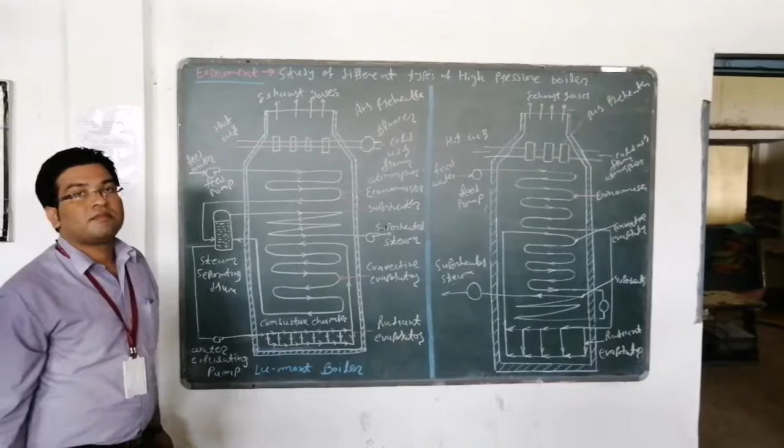Okay. Hello, today I am going to discuss the study of different types of high pressure boiler. Right? High pressure boiler. Boiler means what? With the help of the boiler, we can generate high pressurized steam. Right? We are talking about the conventional boiler, which consists of the Lancashire boiler, Babcock and Wilcox boiler, and Cochran boiler. These are the conventional boilers.

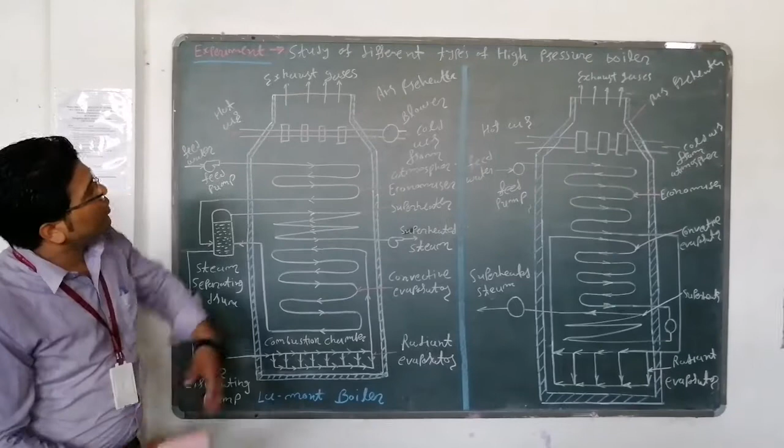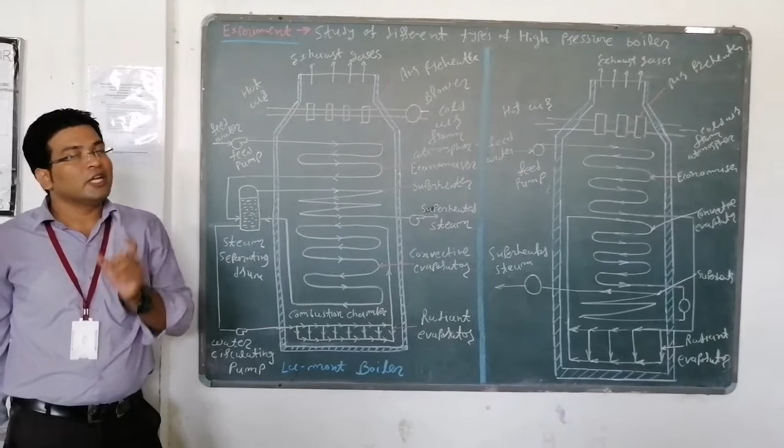Okay. Right now, over here we can study the different types of high pressure boiler. So you must know about the range of the high pressure boiler. That's why you must know about the IBR. What is the full form of IBR? Indian Boiler Regulation. IBR recommended a range of 42 bar and up. High pressure boiler range is 42 bar and up, that is called the high pressure boiler.

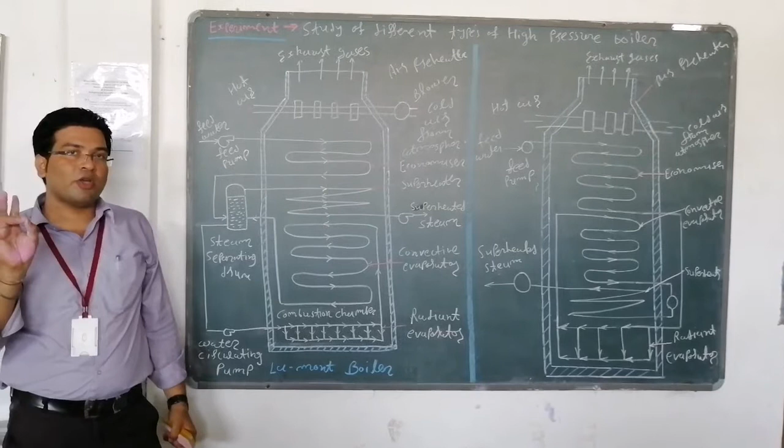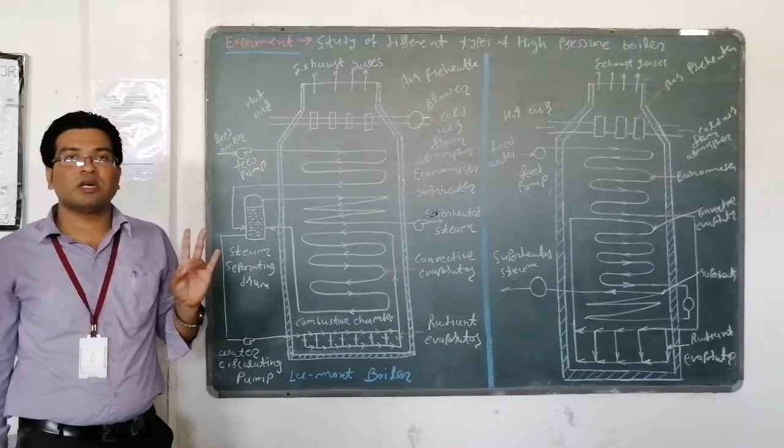So we can say the classification of the boiler is low pressure boiler, medium pressure boiler and high pressure boiler. Low pressure boiler range is around 3.5 to 10 bar, medium pressure boiler 10 to 25 bar, and above 25 bar, or we can say 42 bar, that is the high pressure boiler. High pressure boilers consist of a number of boilers: Lamont boiler, Loeffler boiler, Benson boiler, supercritical boiler, supercharged boiler. These are high pressure boilers, meaning the pressure range is around 42 bar and up.

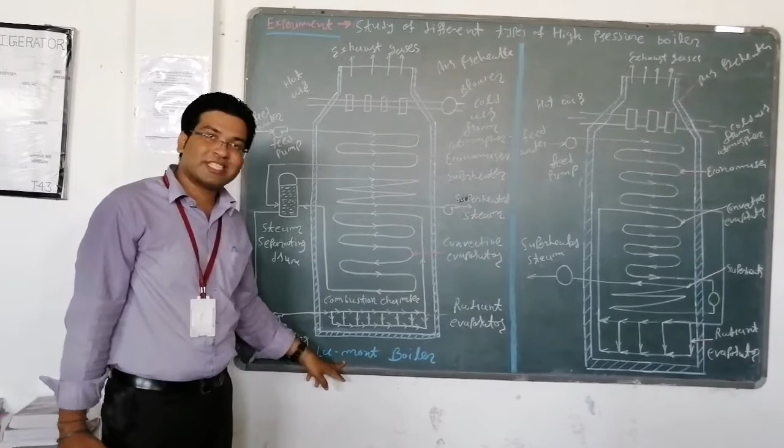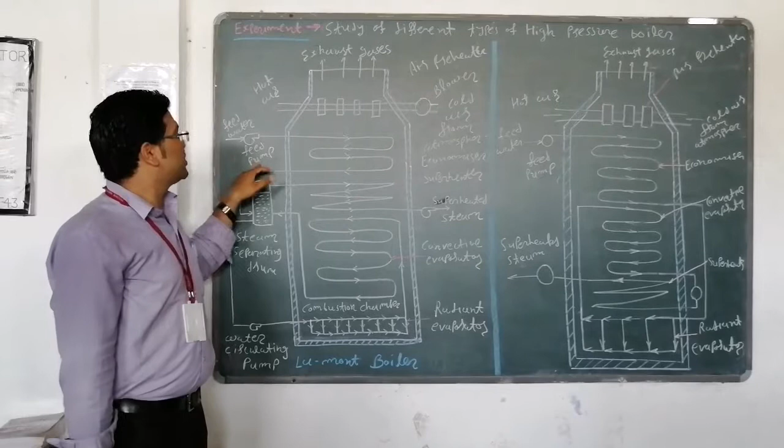So over here you can see this is the Lamont boiler, which is the first forced circulation boiler, founded by Lamont in 1925. Over here you can see the figure. This is the Lamont boiler. Forced circulation and natural circulation. Forced circulation means with the help of a feed pump; a little bit of pump is required for increasing the pressure. That's why it is called a forced circulation boiler.

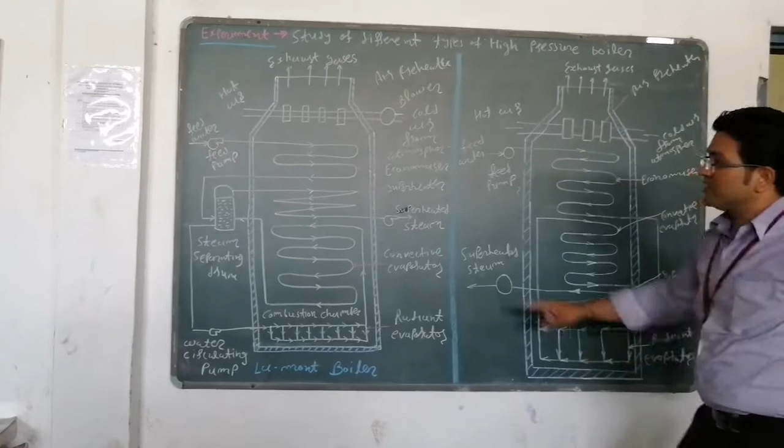Natural circulation boiler means what? According to density, water will travel from the upward direction to the downward direction. That is called the natural circulation boiler. So these both are forced circulation boilers. Another kind, you can see, is the vertical boiler. According to the drum axis, these are vertical boilers. So in this classification, first of all you must know the function of the air preheater, economizer and superheater. These are the accessories.

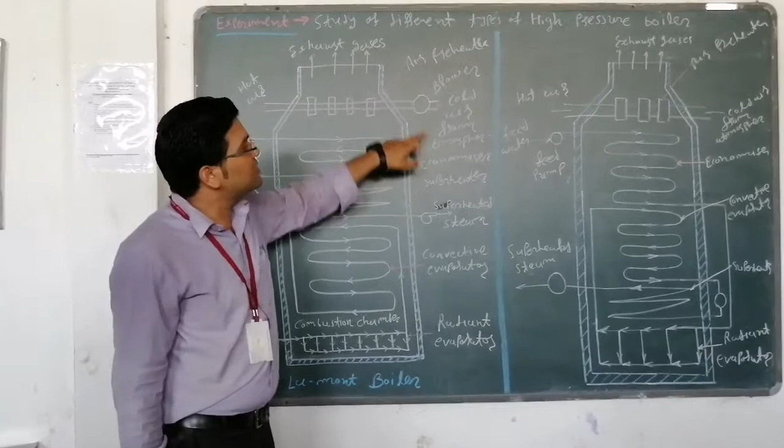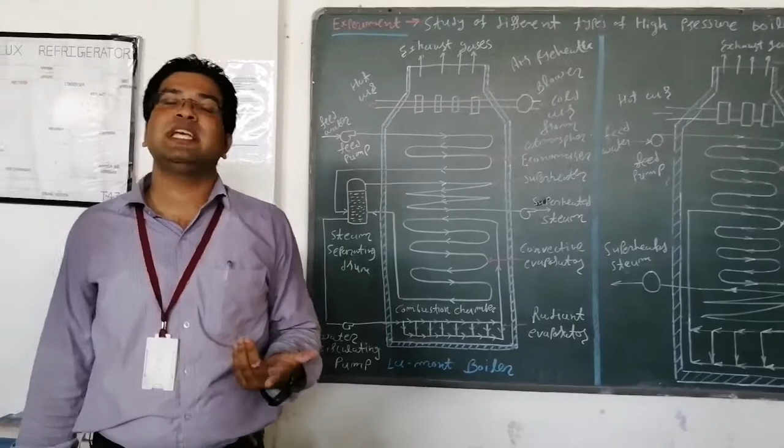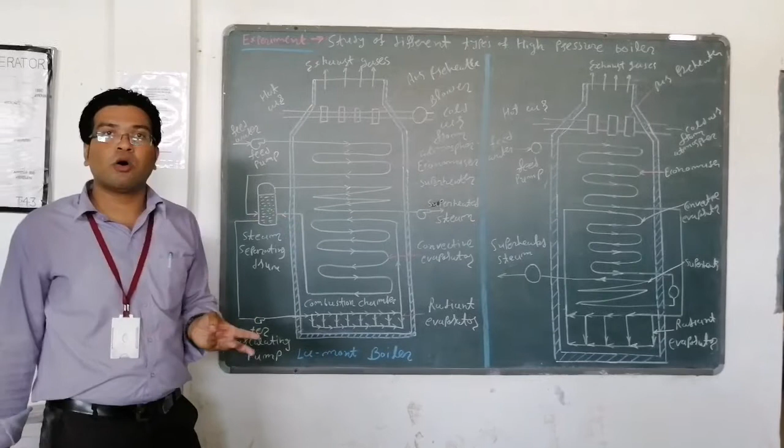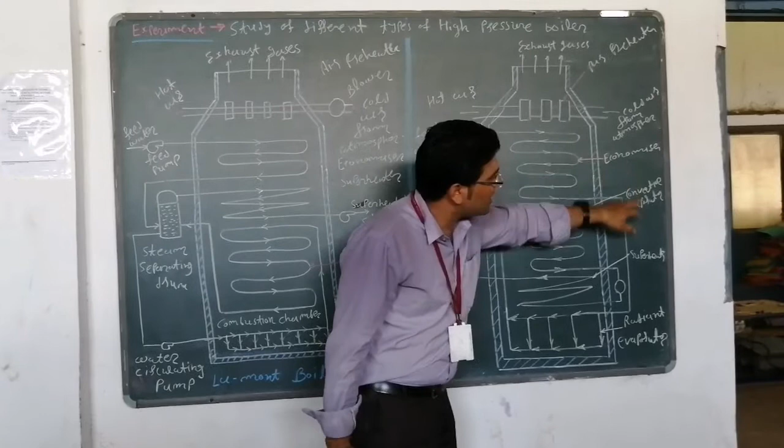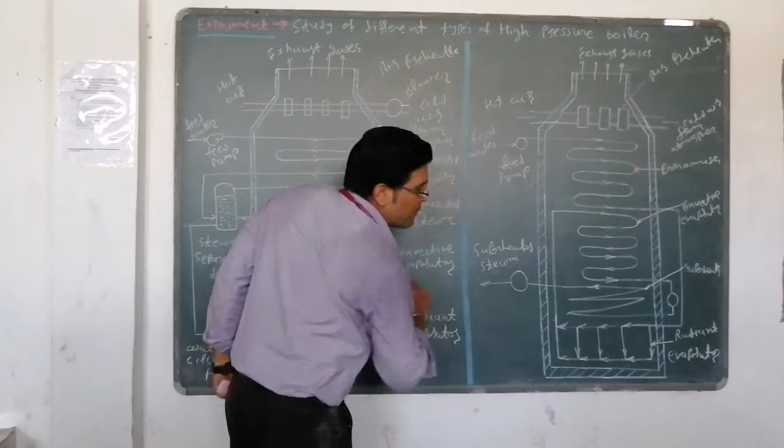Accessories means what? These are the accessories: air preheater, economizer, superheater. Over here also you can see economizer, superheater. With the help of accessories, we can increase the efficiency of the boiler. So over here is the Lamont boiler, and this is the Benson boiler. First of all, we start with the Lamont boiler. You can see the cold air from the atmosphere passes into the air preheater, and for the function of the air preheater, just the name is enough.

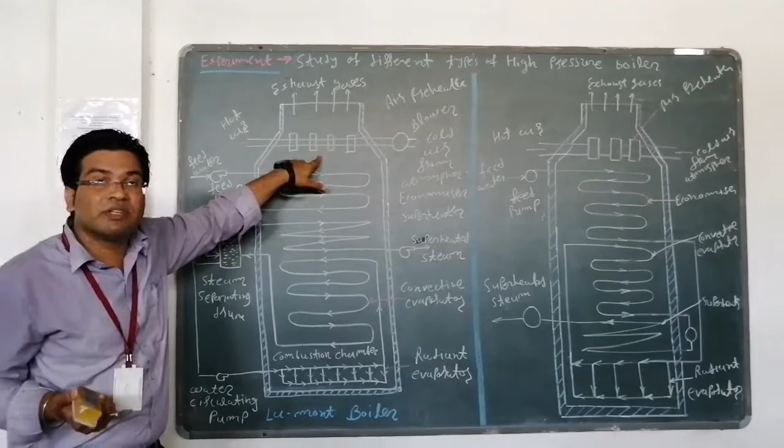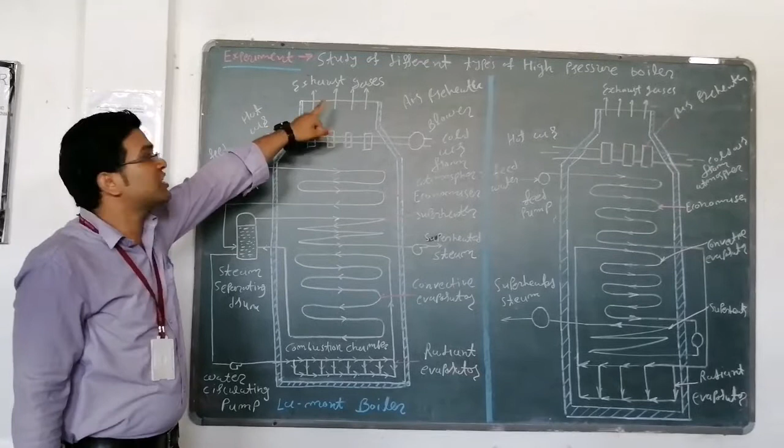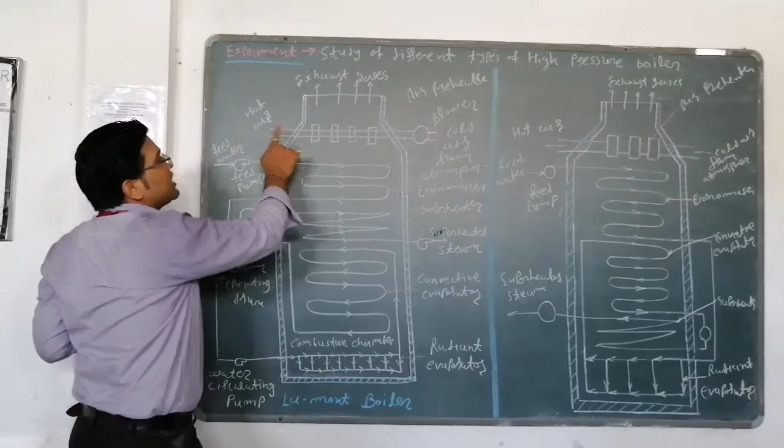Air preheater means the air temperature will be increased with the help of hot flue gases. Whenever we combust the fuel, hot gases will be generated. These gases go in the upward direction due to low density. Hot gases travel upward and pass through the chimney. Over here we can see the exhaust gases passing from the chimney. So this is the air preheater; the air temperature increases, and that hot air goes into the combustion chamber.

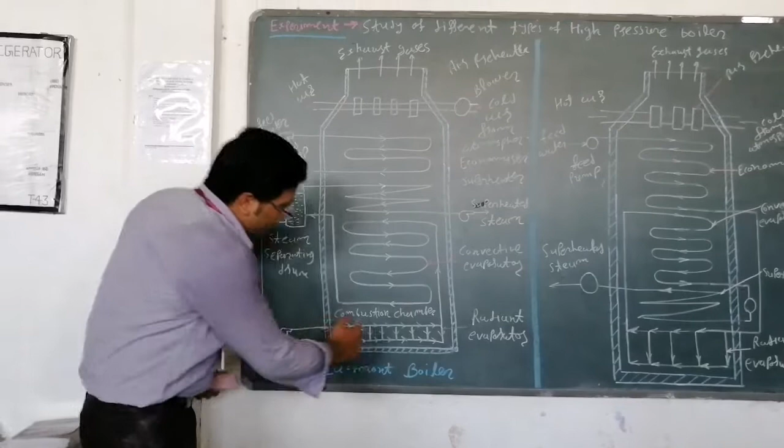In the combustion chamber, hot air is required for the combustion purpose. That's why we are introducing it with the help of flue gases. The air temperature will be increased and that hot air passes into the combustion chamber. So in the combustion chamber, what actually happens is we introduce the fuel.

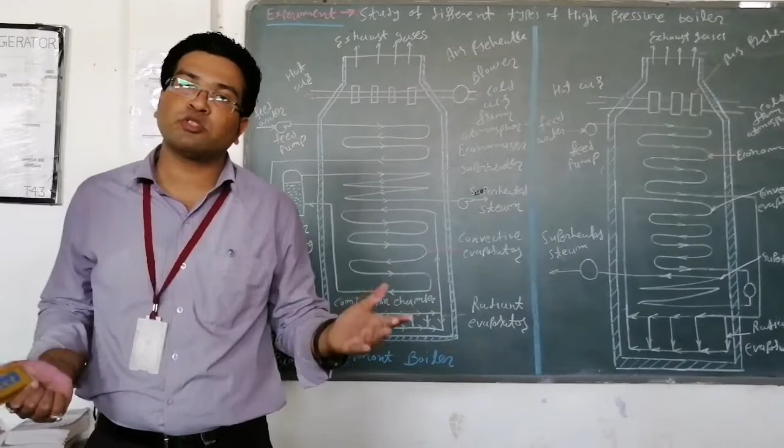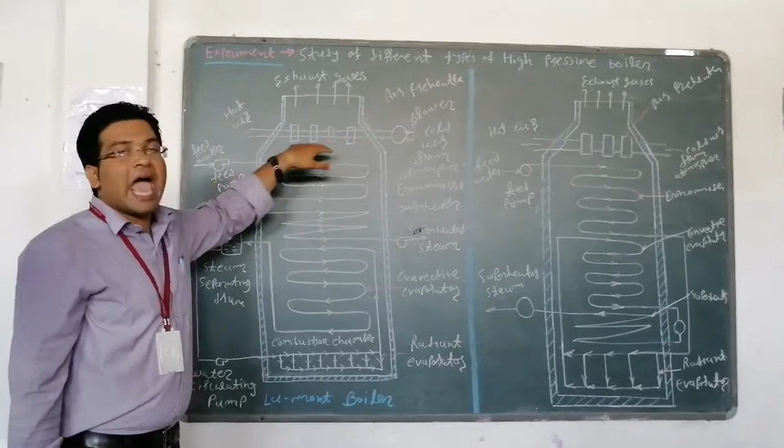In the boiler, we are introducing the fuel. Fuel is a substance composed mainly of carbon and hydrogen, and it produces a large amount of heat when burning with oxygen. So oxygen is required, air is required. That's why here we introduce the air preheater, where the temperature of the air will be increased.

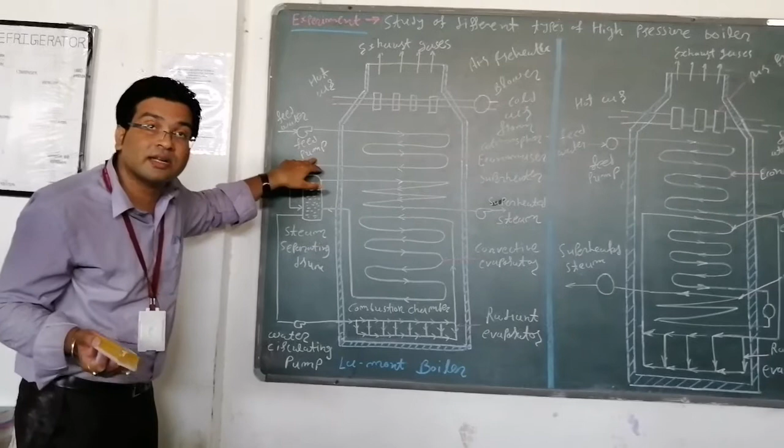After this, we start the water circuit, the water line. Feed water passes through the feed pump. The pump will increase the pressure of the water, and after this, the water passes into the economizer.

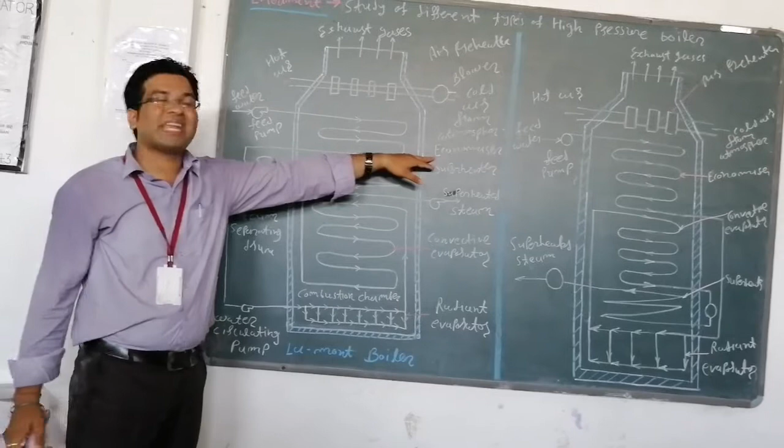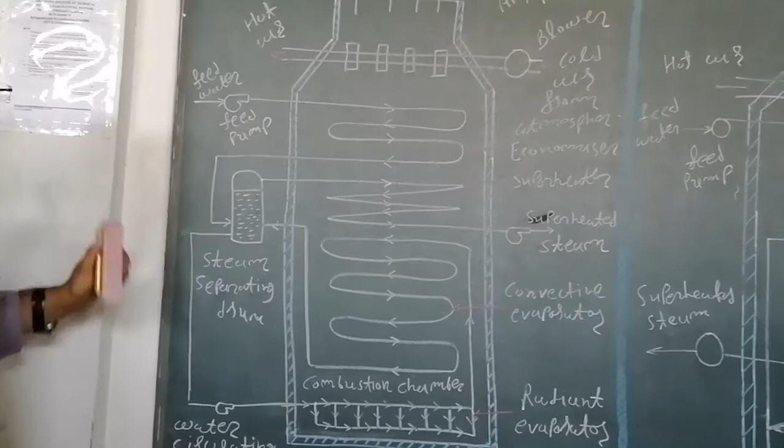This line is known as the economizer. In the economizer, the water will be heated with the help of flue gases generated by the combustion. So here, feed water temperature will be increased, and that feed water passes into the steam separating drum.

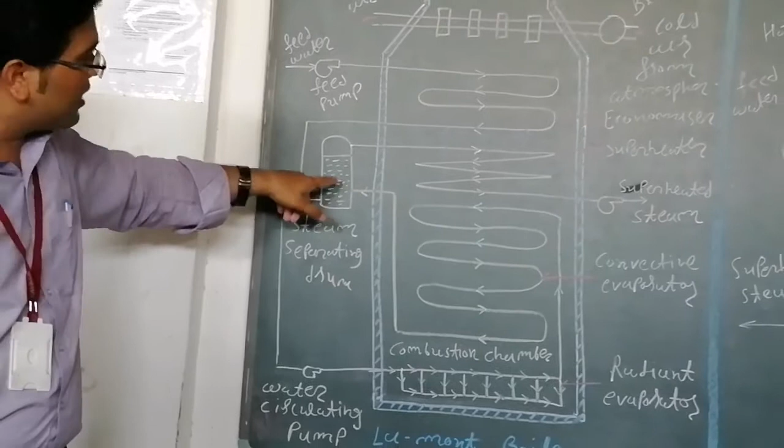This is the steam separating drum. Here the water comes down, and after this, water passes with the help of the water circulating pump and goes into the radiant evaporator. This is the radiant evaporator, and this is the convective evaporator. Here, water heat will be absorbed by radiation.

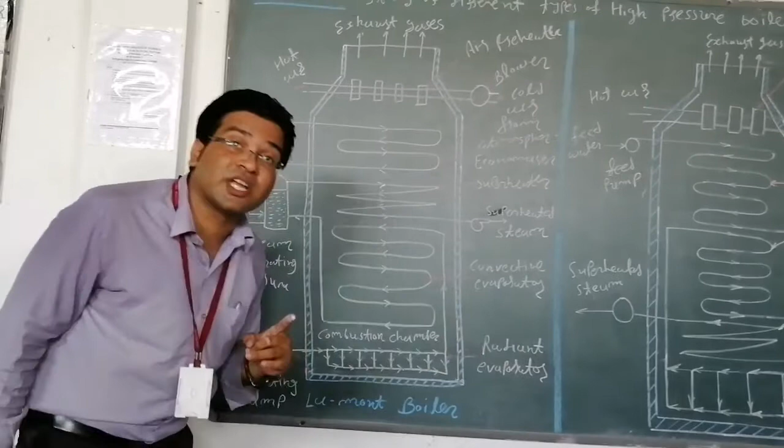You must know about the heat transfer modes: conduction, convection, and radiation. So here, due to radiation, heat will be absorbed by the water. That's why it is called the radiant evaporator.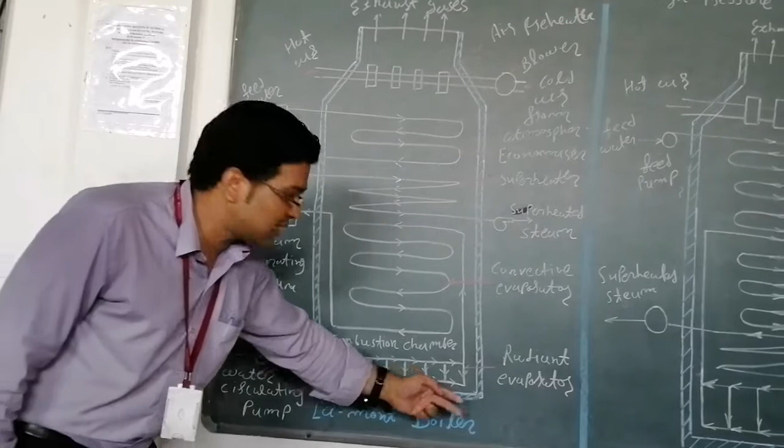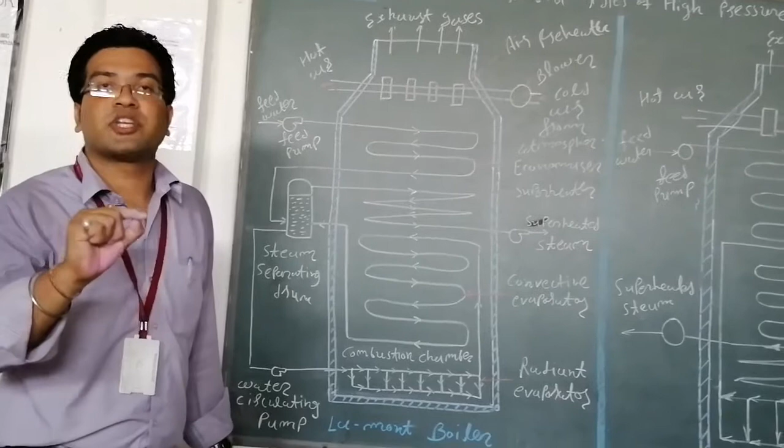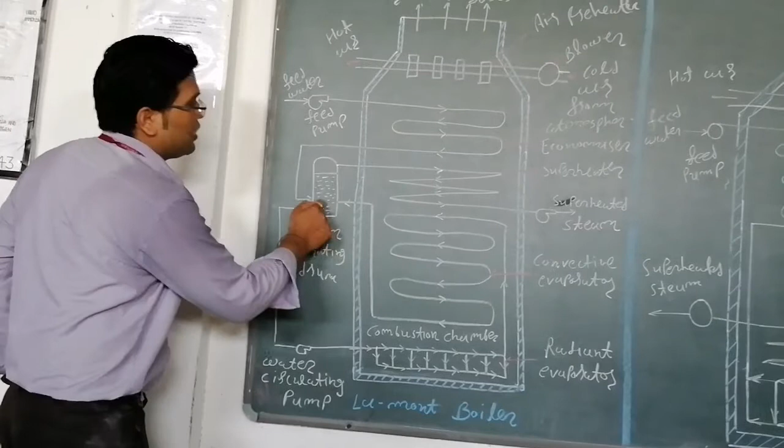Here, heat will be absorbed by convection. So here from radiation, and here from convection, heat will be transferred to the water, so water is converted into steam. Those steam goes into the steam separating drum, and here steam is generated.

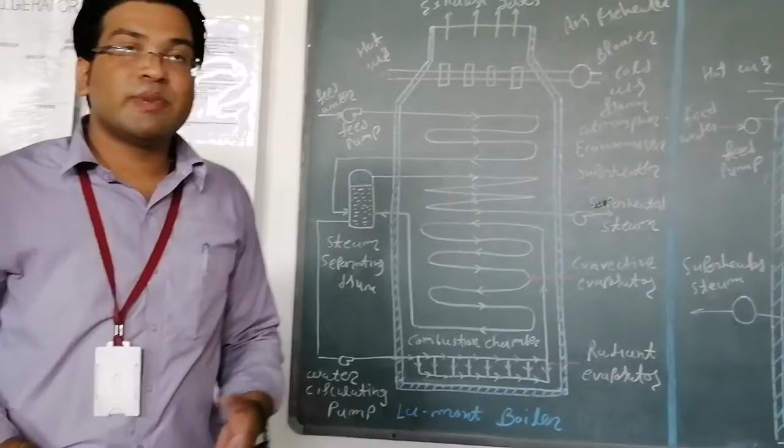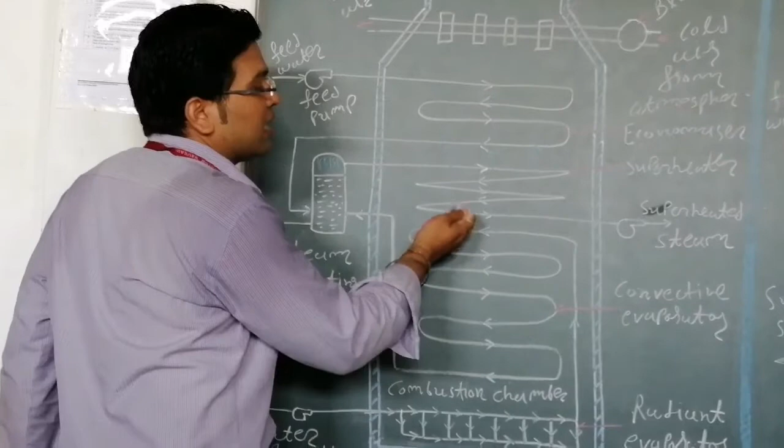Here, generation of steam happens, and that steam passes into the superheater. The superheater is one type of accessory, meaning efficiency will be increased. Whatever steam temperature is in the superheater, the hot flue gases convert into low flue gases. So here we get superheated steam.

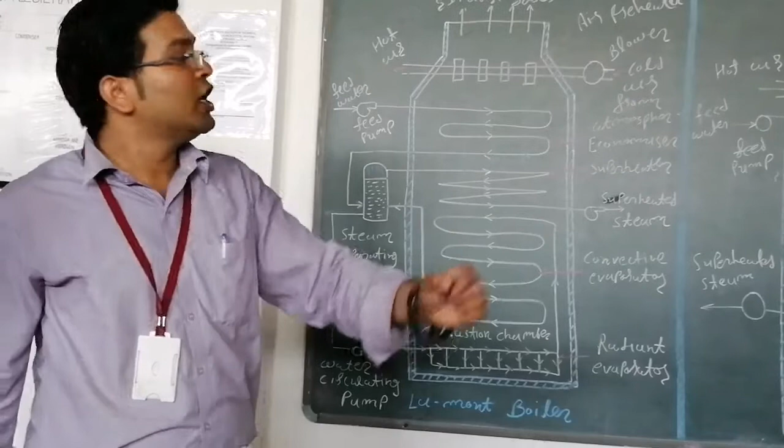The boiler's main function is what? High pressurized steam will be generated, and that steam is required to rotate the steam turbine, and with the help of rotating the steam turbine, we can generate power. So the boiler's main function is to generate high pressurized steam.

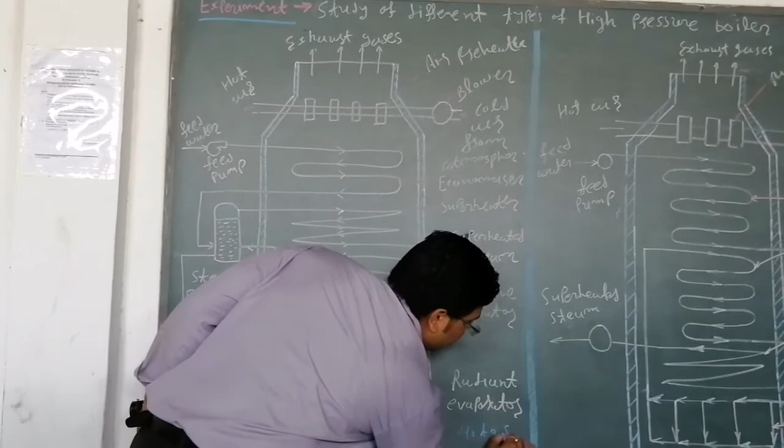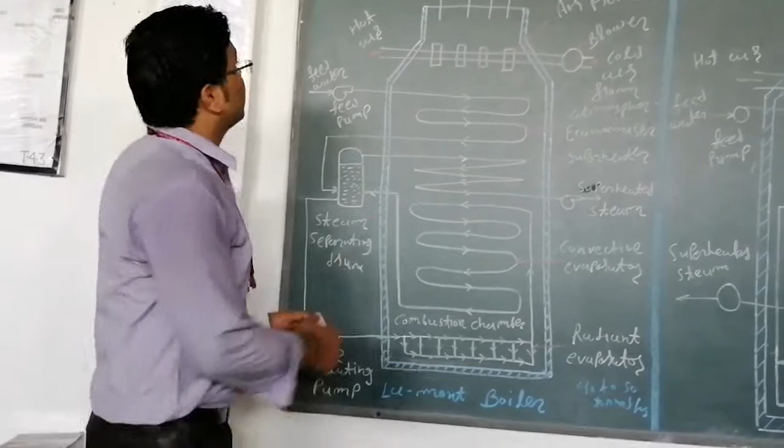The Lamont boiler has a steam generation capacity of around 45 to 50 tons per hour. What about the pressure of the Lamont boiler? 120 bar. The pressure of the Lamont boiler is around 110 to 120 bar.

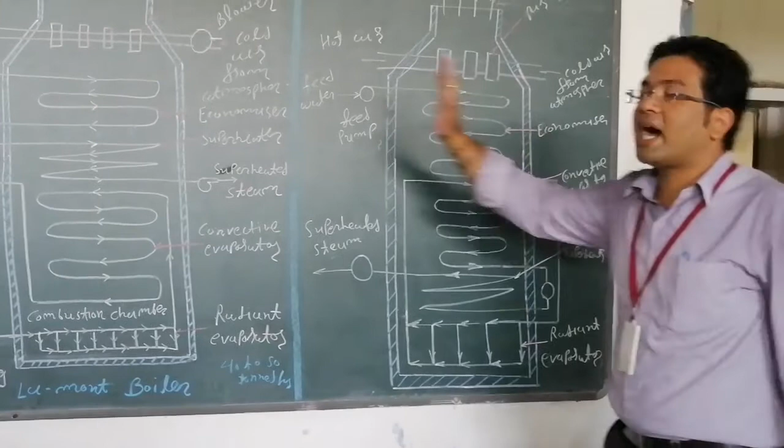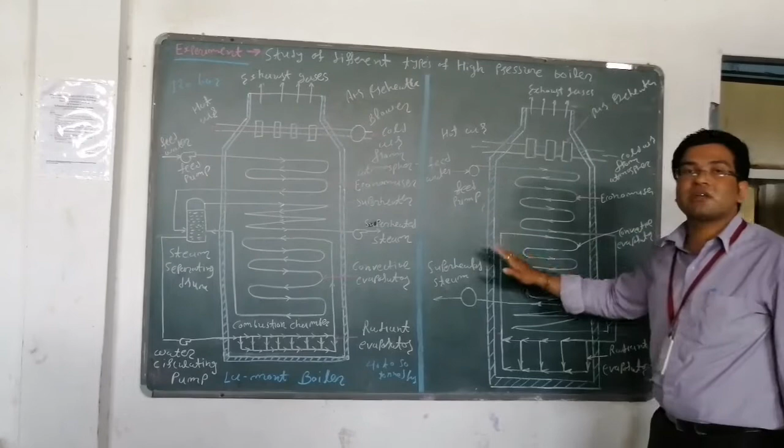Here you can see this is the Benson boiler. Here we have the air preheater, economizer, and evaporator, which are the same as before. But one more thing: here you can see this is the steam separating drum in the Lamont boiler. But here, in the Benson boiler, there is no kind of reservoir or drum in the circuit.

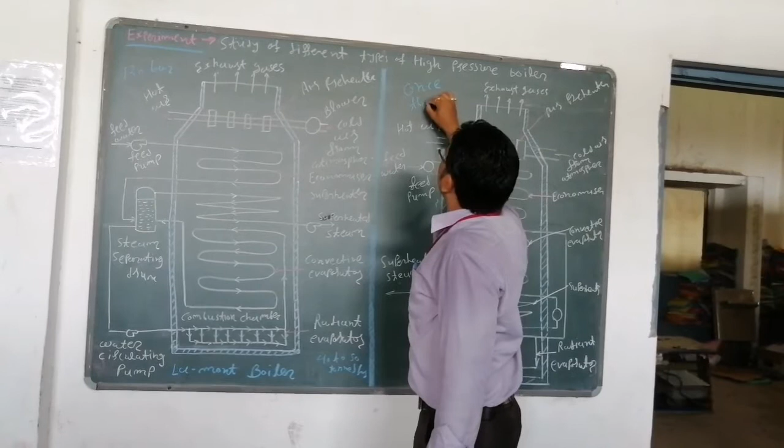That's why it is called a once-through boiler. Why is it called a once-through boiler? Because in between we are not using any kind of drum like a separating drum. So this is one end and this is the second end, with no kind of reservoir. That's why it is called a once-through boiler. The Benson boiler is known as a once-through boiler.

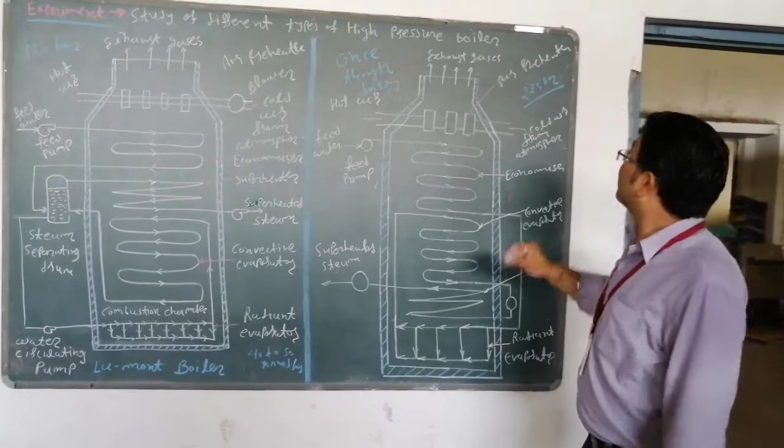What about the pressure of the Benson boiler? Around 225 bar, which is the critical pressure. This means that whenever water flows from the feed pump, after some time the water is converted directly into steam, because of the high pressure boiler's critical pressure of 225 bar.

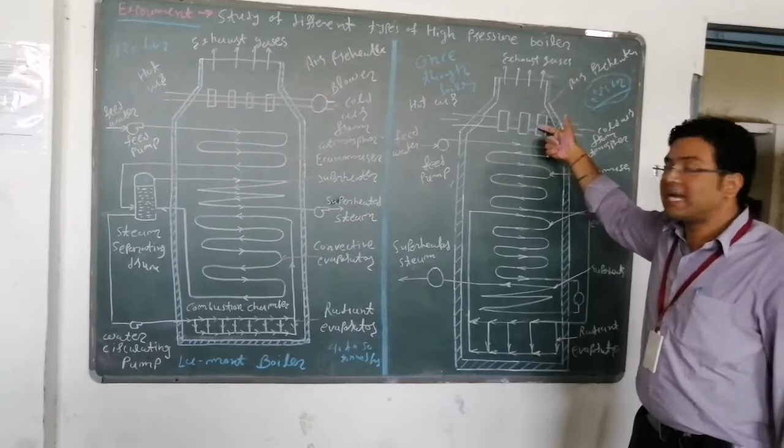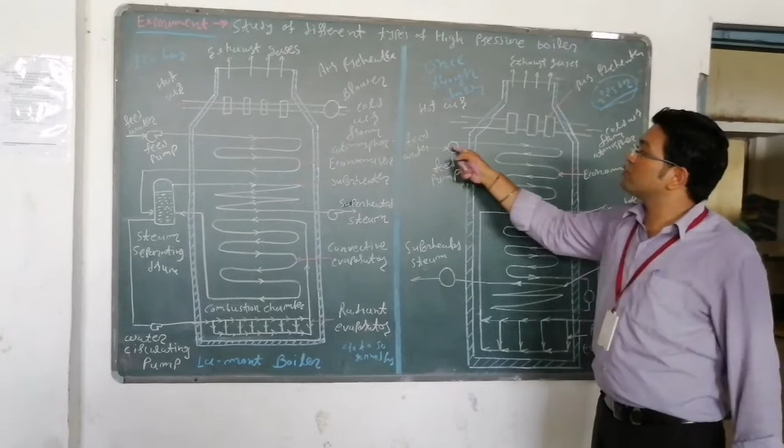So first, air passes from the air preheater, where air temperature is increased, and hot air passes into the combustion chamber along with feed water. Feed water passes to the feed pump, pressure is increased, and this water passes to the economizer.

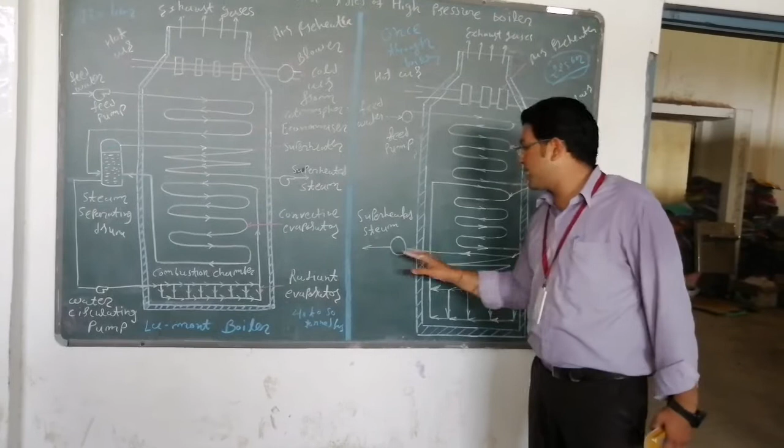Economizer function is to heat the water using the flue gases. The water passes through the radiant evaporator, then the convective evaporator, and lastly through the superheater. The superheater function increases the temperature of the steam.

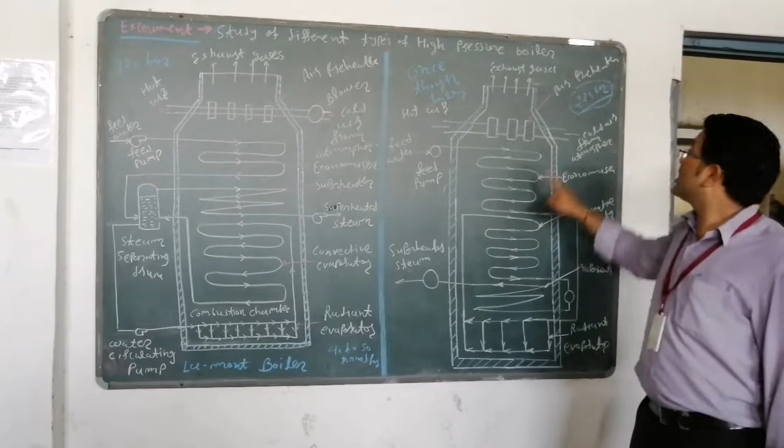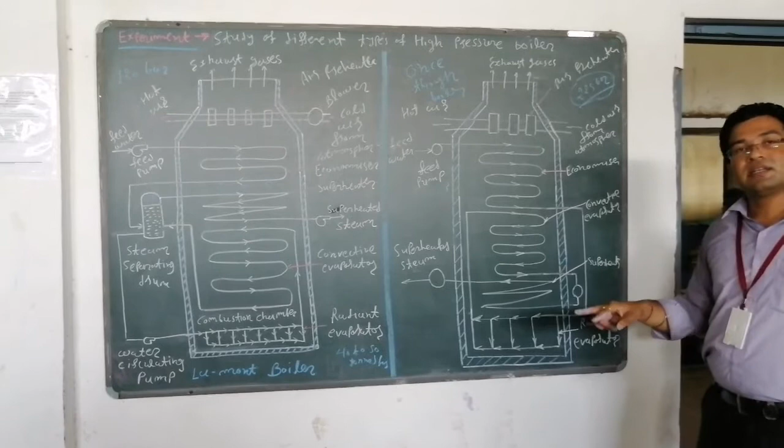This is another kind of high pressure boiler, ranging above 225 bar pressure, but the Lamont boiler working pressure is 120 bar. Both are vertical, forced circulation boilers, and both are stationary boilers.

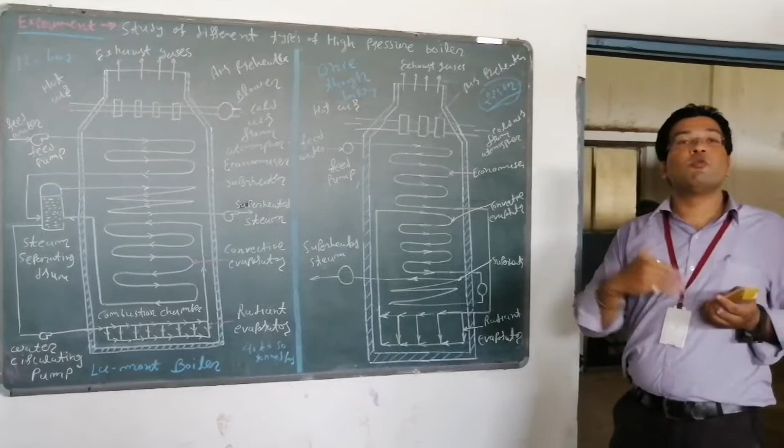Stationary and mobile type. Stationary means it's very difficult to move from one place to another. Mobile type means you can easily move it from one place to another. So these are the two types of high pressure boiler.

Another kind of high pressure boiler includes the Loeffler boiler, Velox boiler, supercritical boiler, and supercharged boiler. The supercritical boiler also works at a working pressure of 225 bar.

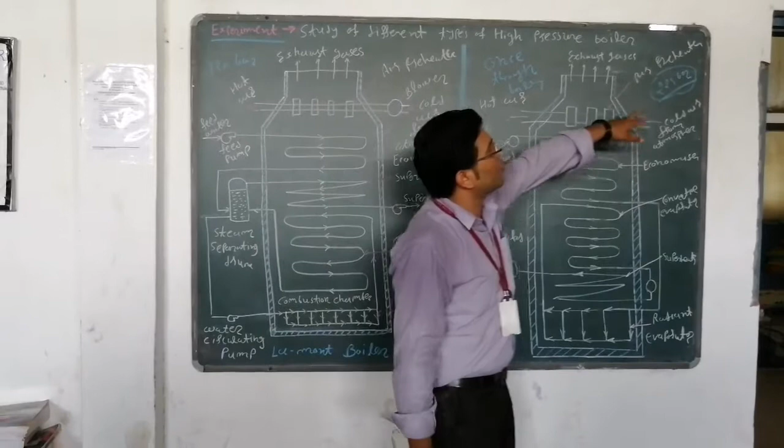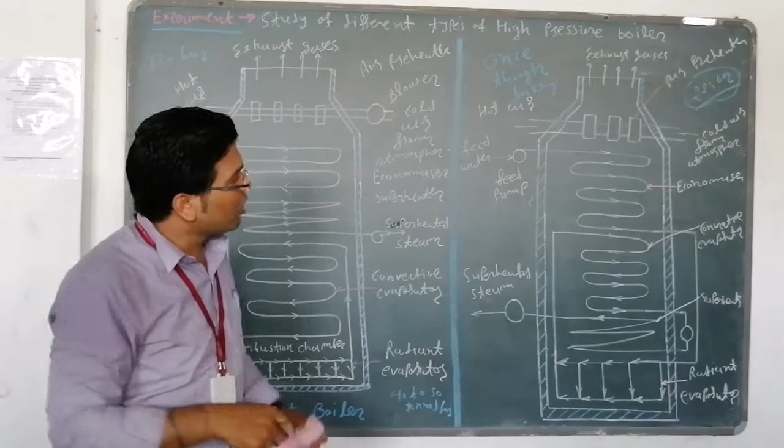Whenever water is fed from the feed pump, it goes into this line and water is directly converted into steam, because it works at a pressure above the critical pressure. So these are the high pressure boilers.

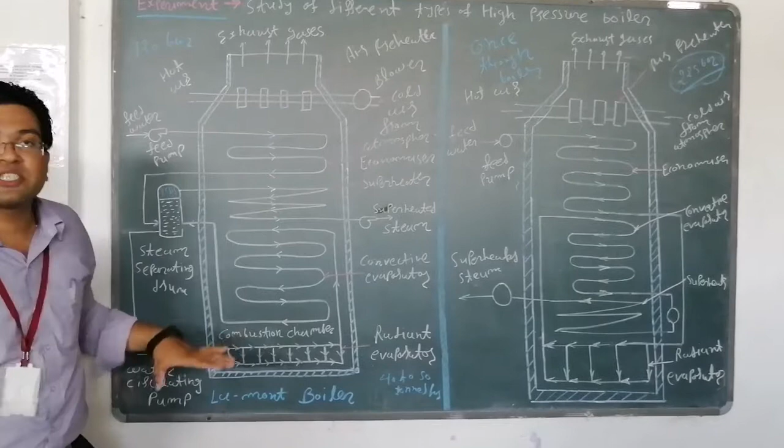Main topic: advantages of high pressure boiler over conventional boiler. First, we are using forced circulation boiler, which means the evaporative capacity is more.

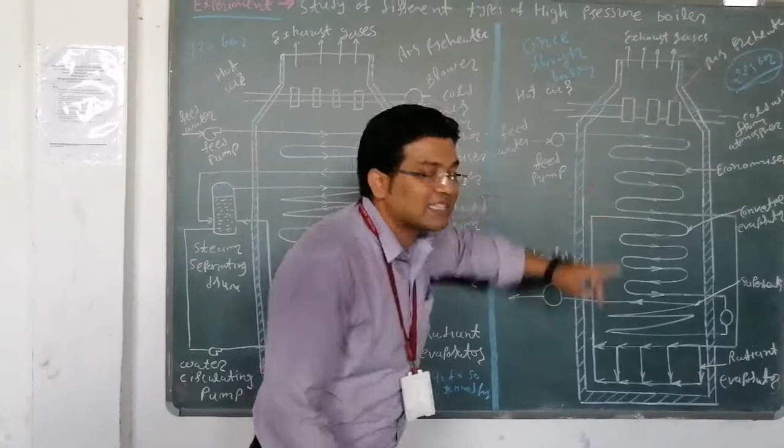In high pressure boilers there is uniform heating. All parts are considered to have uniform heating, which means there is no need of overheating.

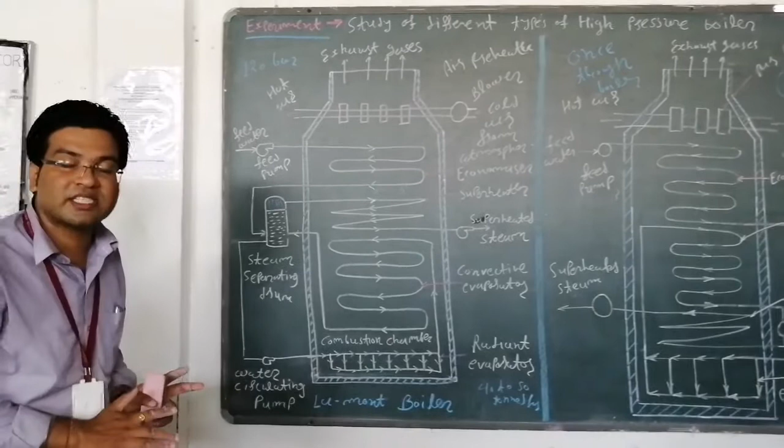Second thing is compact. These boilers are compact, so less storage area is required. Third, pressurized combustion, where we are using fuel.

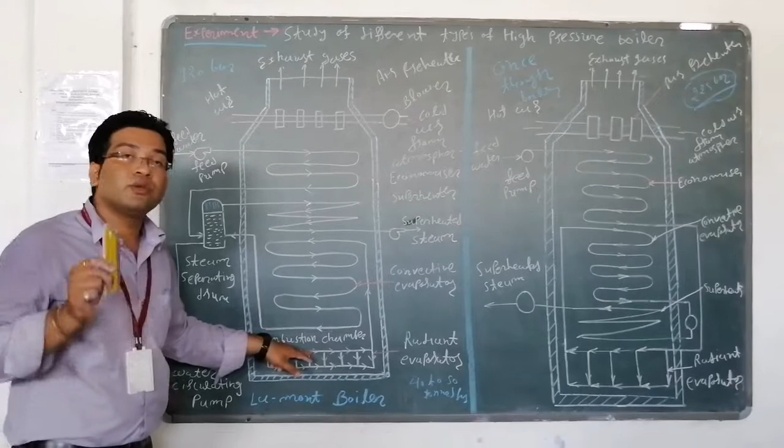Here we use pressurized combustion. When pressurized combustion occurs, the combustion rate increases, heat transfer rate increases, and heat release rate increases, according to the pressurized combustion.

And this boiler starts rapidly, quickly. So these are the boilers.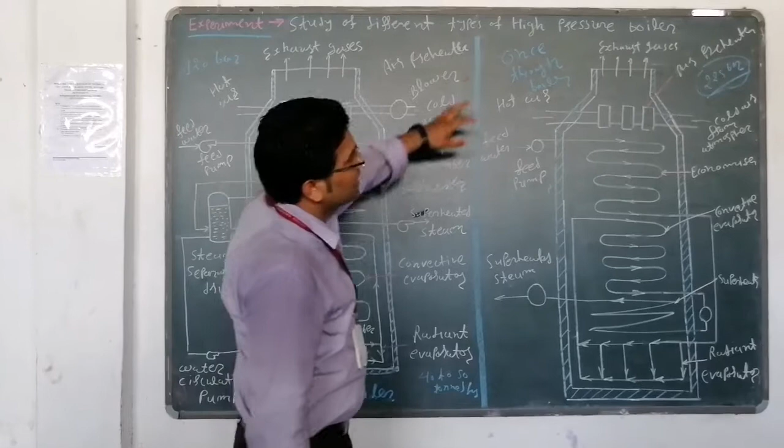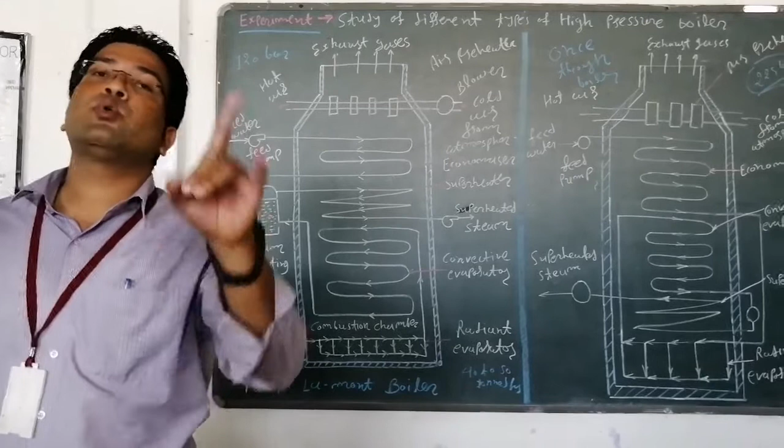You must know that high pressure boiler means in the range of 42 bar and above. Here the Lamont boiler pressure is 120 bar and the Benson boiler pressure is 225 bar. Another kind, the supercritical boiler, also works above the supercritical pressure, around 225 bar.

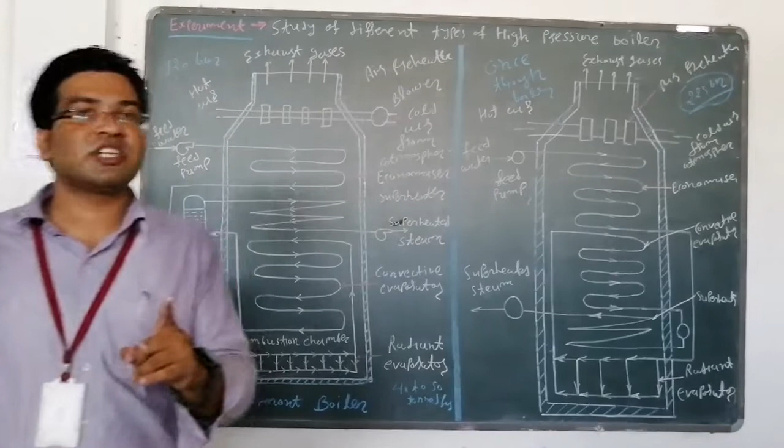In a boiler, we must know its function: high pressurized steam is generated and used in the steam turbine. From the steam turbine, coupled with a generator, we can convert mechanical energy into electrical energy.

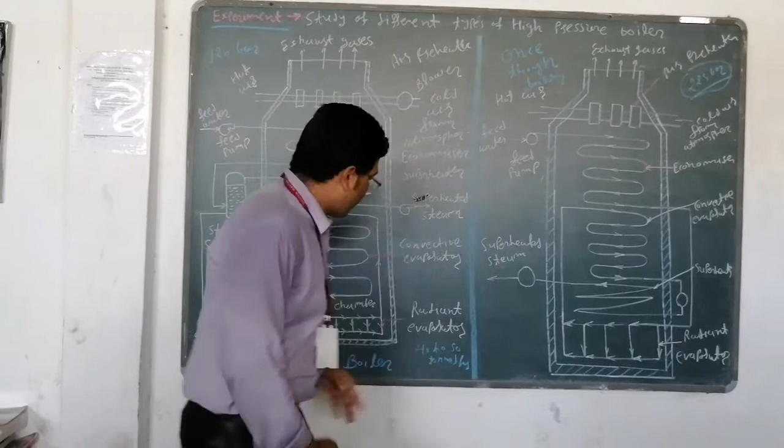Another kind of boiler can also be used. Here, which kind of fuel is required? We are using coal as fuel. But which type of coal? You must know about the classification of coal.

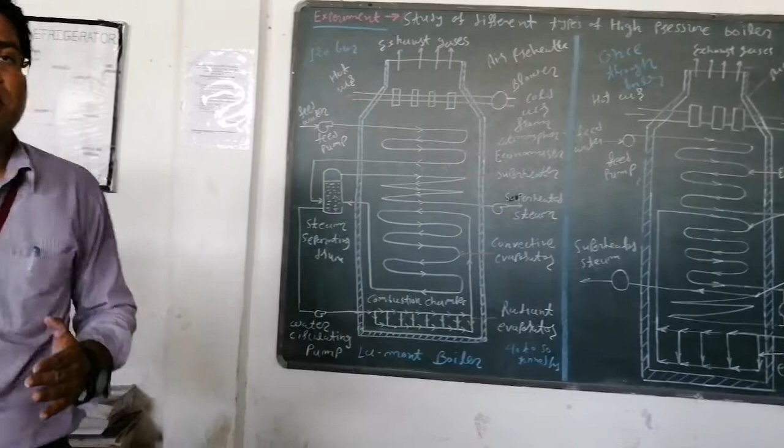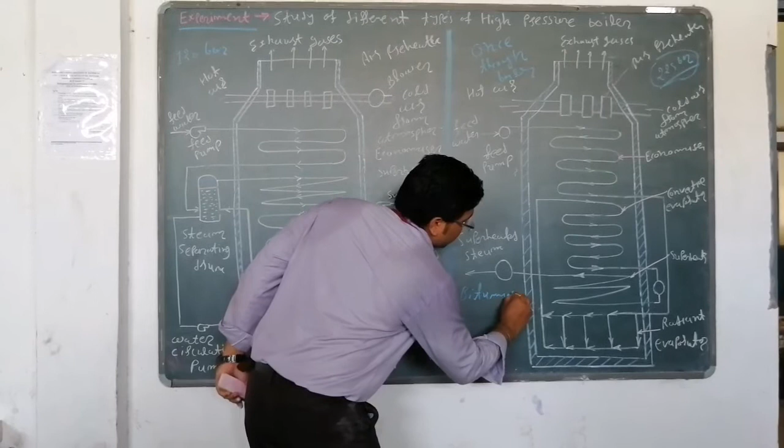Fuel is classified as solid fuel, liquid fuel, and gaseous fuel. In solid coal, you have bituminous coal and anthracite coal, along with lignite coal.

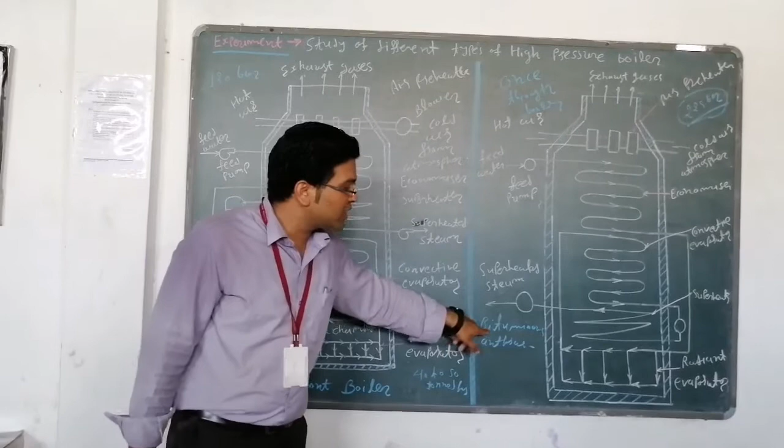Anthracite coal is very hard coal, and its calorific value is very high. But the main drawback is that anthracite coal is very costly compared to other coal. That's why in India we do not use anthracite coal in boilers; instead we use bituminous coal or lignite coal.

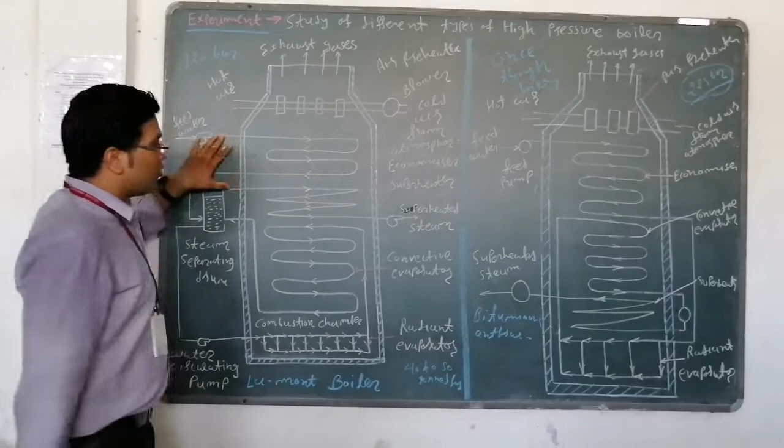So here you can see the high pressure boilers: this is the Lamont boiler and this is the Benson boiler. The Benson boiler is known as the once-through boiler.

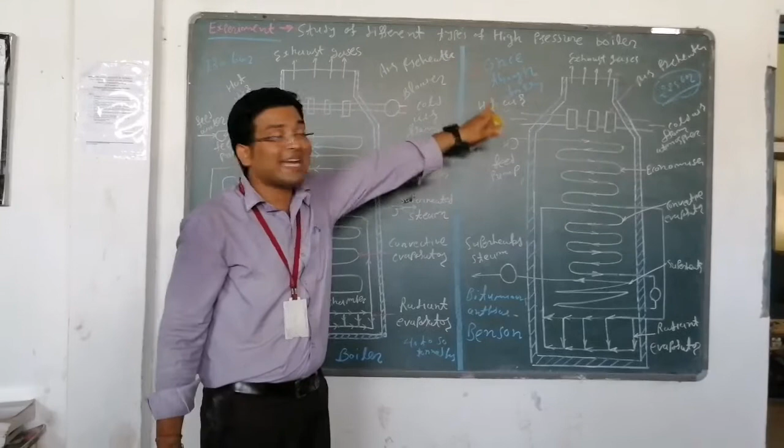Why is it called the once-through boiler? Because no drum is required or inserted into this circuit. That's why it is called the once-through boiler, and it operates above critical pressure, around 225 bar.

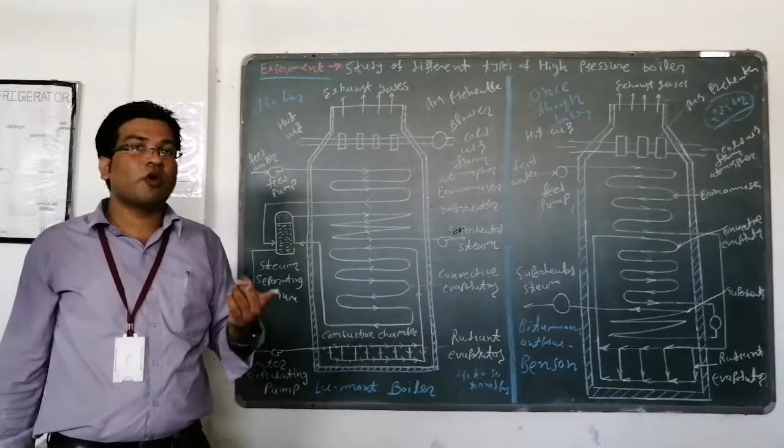So these are the high pressure boilers. Advantages over conventional boiler, as already discussed: forced circulation boiler means evaporative capacity is more, pressurized combustion means steam generates faster, heat release rate increases, and boilers are compact, meaning less floor area is required.

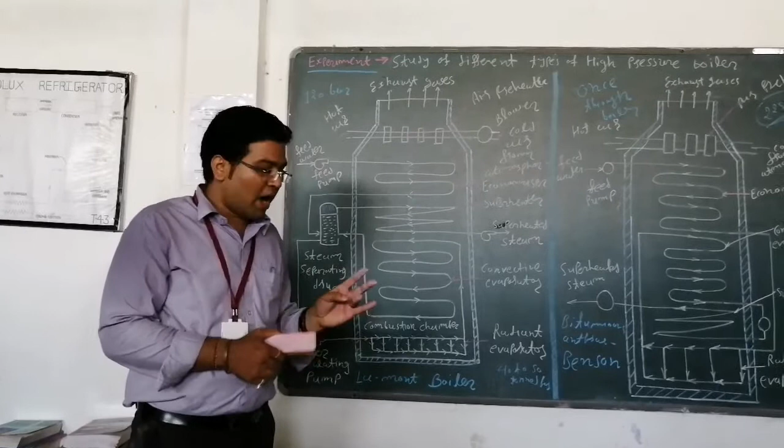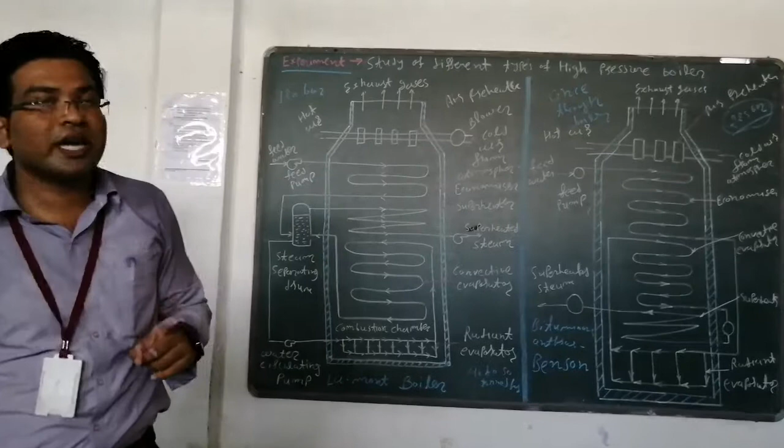It starts rapidly and plant efficiency increases. Plant efficiency increases because this boiler works at high pressure, which increases efficiency. So these are the different types of boiler we have discussed.